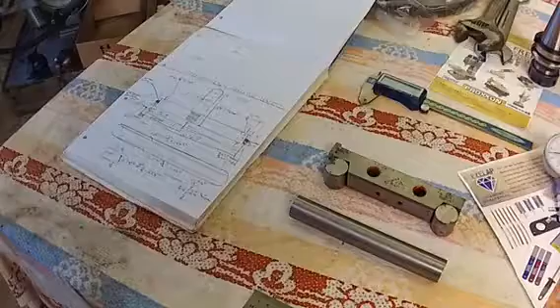We're back on this tramming gauge again. I've been off it for a week or more, just been busy. Well, it hasn't been such a bad thing, because I was going to make it originally about 10 inches long to suit the disc I skimmed down.

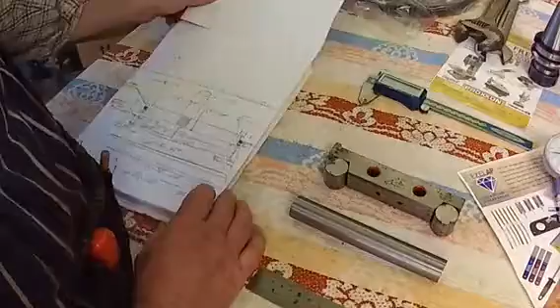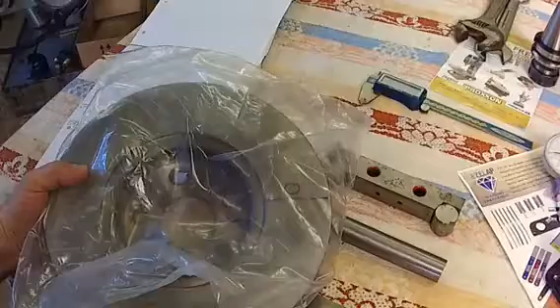So I was going to make it to fit this, but we trammed it across there. A good long bar would catch this 10 inches quite easily.

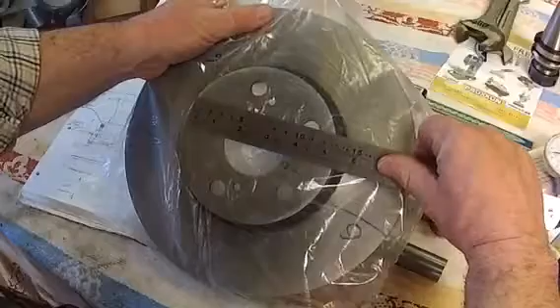Then I had a rethink about that, and across here we can do it on about 5 1/8 of an inch, something like that. So I decided to sit this onto the vise this way up and do my tramming around here, rather than that way round and do my tramming around the outside.

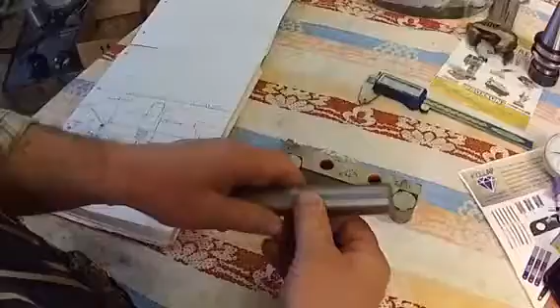That way I can use my 5-inch sine bar. Now it's 6 inches on the table of the sine bar, but it's actually a 5-inch sine bar, as you can see from here to here. So if we make it out of this, which I've just turned down as is, we'll be able to put both gauges, the other one's fastened, through the bar.

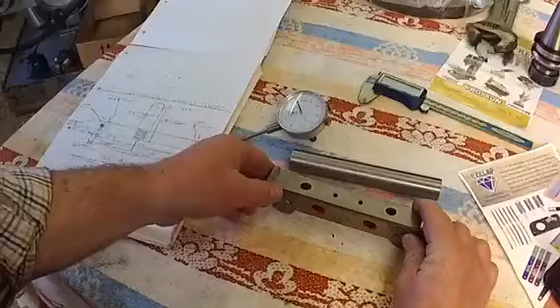So this gauge will go through this bar, like so. And then we'll be able to tram at any angle as well, with our gauge blocks, with this in the mill head. So this will be in the mill head, like that.

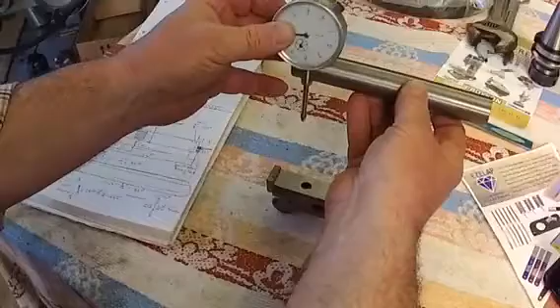So the plan is, I'm going to put some flats on here. I think about 3/8, something like that. Should have looked at mine before I started, shouldn't I? We're going to put a flat on here and a flat on the bottom, and then drill 3/8 holes through here.

This will go in, and we'll have one that side as well. We'll have a rod through the centre, which goes into the chuck or the collets of the mill, and happy days. Then however we want to tram the mill, we'll have two gauges. Just, I don't know, seems an easy way of doing things, and it's something to do.

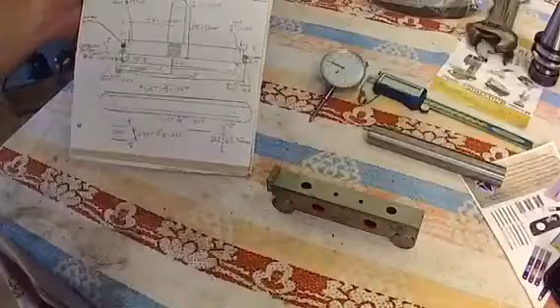I've got it all drawn out, but I drew it out at 10 inches, so I can still use my drawings, just scaled down to 5 inches. So now the holes will be 5 1/8 of an inch apart.

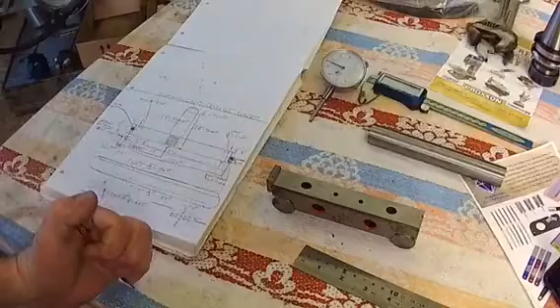5 1/8 will be here somewhere, and on the disc it fits about perfect around the outside, so it doesn't catch any holes. So that's the plan of action.

So over to the mill, and we'll start by putting some flats on here and on the bottom, and then we can drill these 3/8 holes. Over to the mill.

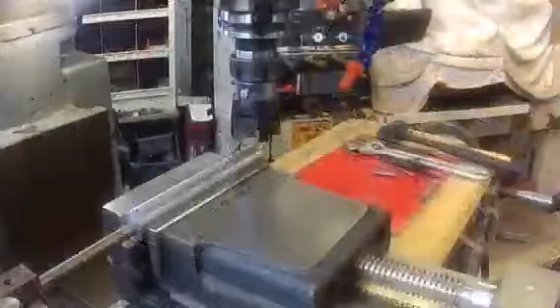Right, so here we are on the mill, and we just want to put a flat on top of here. I've touched off, we're about - let's just have a quick look. There, if I put it in gear.

Just set 0 on the DRO, and we did it with a bit of paper, which was about 5 thou. Just want to touch off. I'm just moving the knee up here, a little bit wider than that. It's a 3/8 hole going in here, so we just want over 3/8 really.

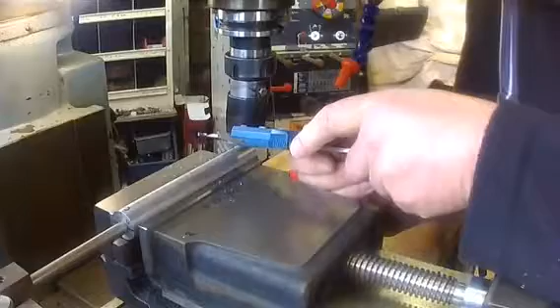About 375 thou. That's 285, so go down to - let's have a look what 20 thou does. We're running the spindle speed about 120, I think, something like that.

Quick look at that - 315. So we'll go 25. Try that. My table speed's about 3.3.

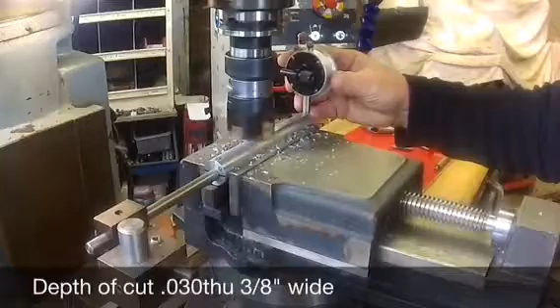I look quite good in that. Right, we'll hoover up, put it back in, and try again.

Right, we're all set up again. We've just had a gauge across it. Oh, we're about - well, no, we're out on the money.

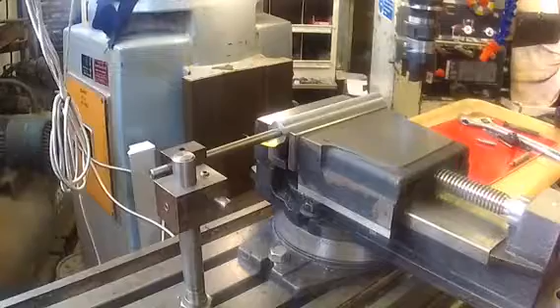Put a flat on this side. See how we get on. We're just touching there, zero the DRO. Up 30 thou on the knee. We're good to go.

Right, there we go, a nice flat on either side. And that's going to have to be it today because I've got to go to work. We'll get it on the surface grinder, tidy it up, make sure it's level both sides, and then we'll start drilling some holes - 3/8 holes here, 3/8 holes here, and probably one a little bit bigger for the shaft in the centre. See you later.

Right, so we can put some 3/8 holes in here. It has automatic power feed, but I don't want to put too much pressure on it. Remember, this is SDM2 on the beautiful readout up there.

That one. Right, STS3 - which I've got written on my device here. So, sorry, SDM. So SDM3. Undo the table locks, and away we go. I'll do it from the other end.

Tighten the table locks up again, and this DRO has been stood now for 3-4 days. I've been away and so on, so it's remembered everything it needs to do. They're great. Just make sure they're put across.

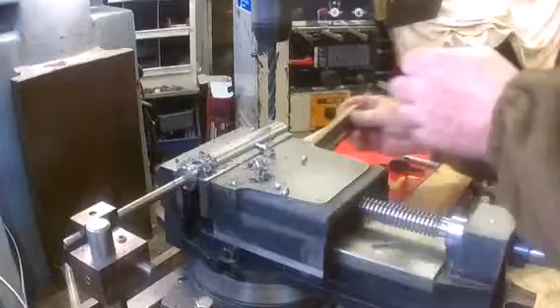Take them out, there we go again. I haven't done any pilot holes. I think the centre hole I'll probably do, I don't know, 10mm threads.

Try cutting fluid, it might go, but oh, that's a bit messy, isn't it?

I've just sharpened the drill so it's fairly sharp. I want to try and get it done because Al's going to come over later with his gears, and we're going to cut some gears. His machine table's not big enough to cope with it, so I'm going to bring it over here and use this one. I just want to try and get this out of the way, so I'm going to take the vice off it.

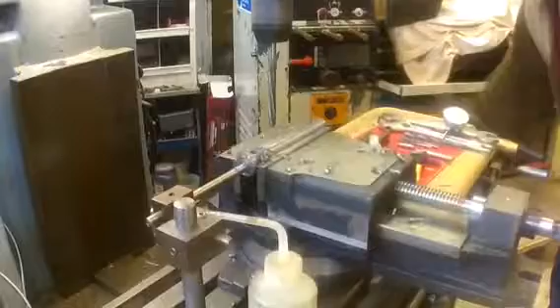Pop a reamer in. So remember this one, we're going back to SDM2. So back up here, SDM2, enter.